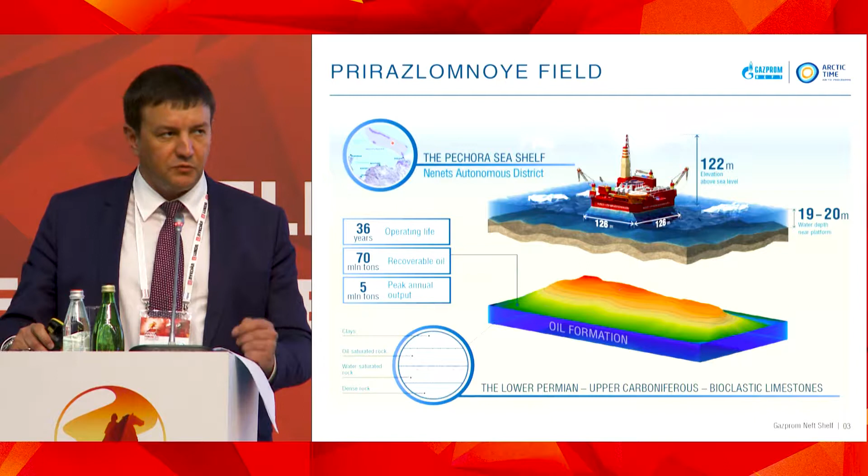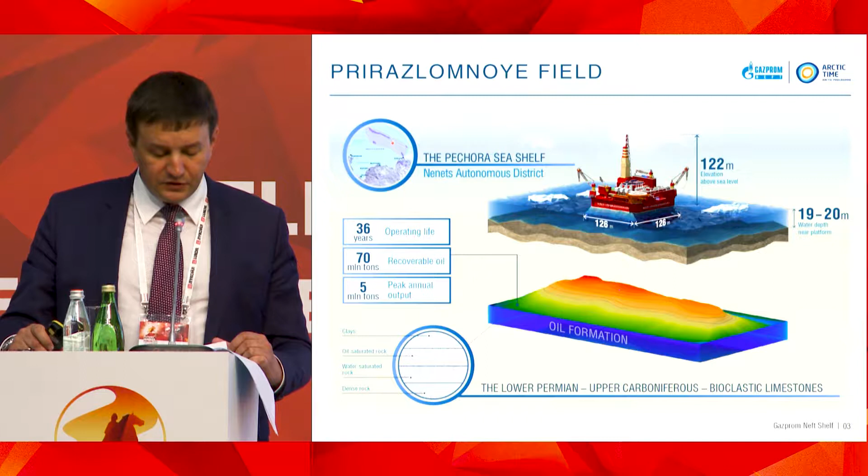This slide shows the geological map of the Prirazlomnoye field. Sea depth is about 19 to 20 meters, and the platform, viewed from above, has an area equivalent to 2 football fields. The operation period will be about 36 years, with the possibility of extending it, and recoverable oil reserves are about 70 million tons.

Climatic conditions in the area of the platform are quite severe. The minimum temperature might be minus 50 degrees centigrade. In the area of the platform, there are about 22 storms a year. Wind speed reaches 8 to 9 points, and wave height during a storm can be up to 9 meters.

Last year we had a storm that happens once in 50 years, with wave heights of up to 15 meters. We also have drifting ice about 7 months a year. Today, the 25th of June, ice is still drifting there.

What are the success factors that are key for the success of the Prirazlomnoye project? Primarily, this is technological efficiency, safety, and environmental friendliness, and of course people are behind all this. Technological effectiveness is clear — in order to produce in the Arctic, we need to apply advanced technological solutions. Previously we couldn't do it, but now there are methods which make it possible to do it and to work safely.

We have a well stock of 32 wells. We have drilled 19 wells so far: 11 of them are producing wells, 6 are pumping wells, and 1 is a special well for sludge drilling, with 1 drilling rig. At the same time, we have the drilling process, oil preparation process, storage, and shipment.

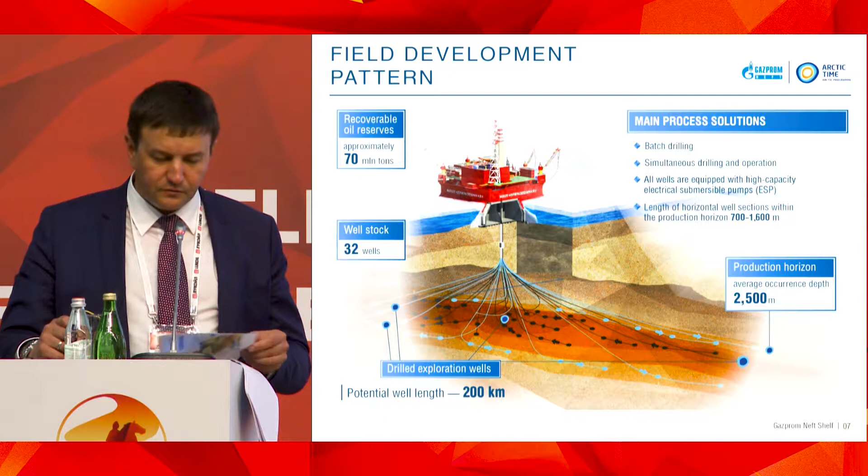All the producing wells are equipped with electric centrifugal pumps of high productivity, and the expected length by the end of development will be about 200 kilometers.

Then the technological parameters of the Prirazlomnoye platform: an accommodation block with a capacity of 200 people. There is a system of devices for comprehensive shipment of oil, and on the platform there is a wave deflector and an ice deflector.

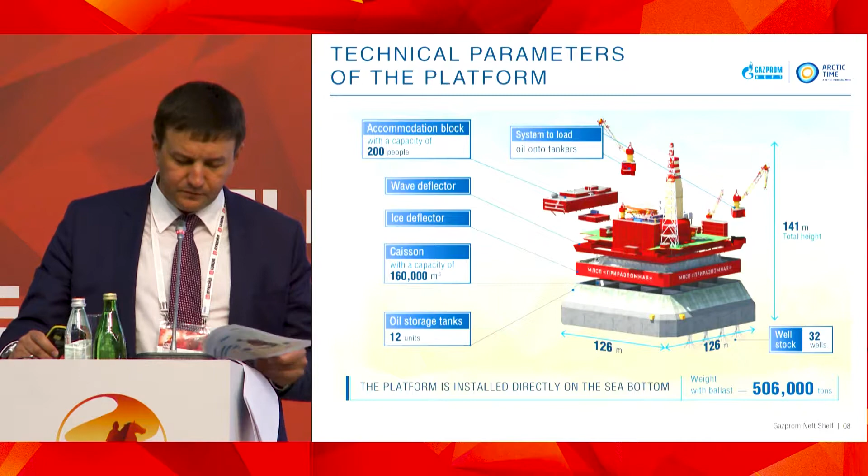It is clear that the wave deflector saves against waves, and the ice deflector helps to combat with the burden of ice. Caisson has a capacity of about 160,000 cubic meters. The oil storage tanks are 12.

A caisson protection system is represented by 2 deflectors, and we also have the low part of the base of the platform with a double layer of steel. There is cathodic and anodic protection and paint. The weight of the platform, including ballast, is more than 500,000 tons.

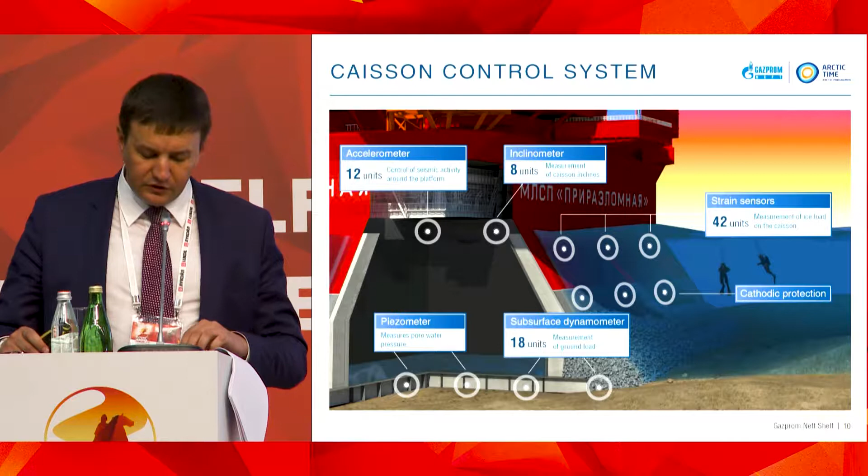This slide shows the caisson control system. We collect data from different sensors, which determine the seismic activity of the platform, measure the incline of the caisson, and ice loads on the caisson. They measure the burden of the platform on soil and water pressure as well.

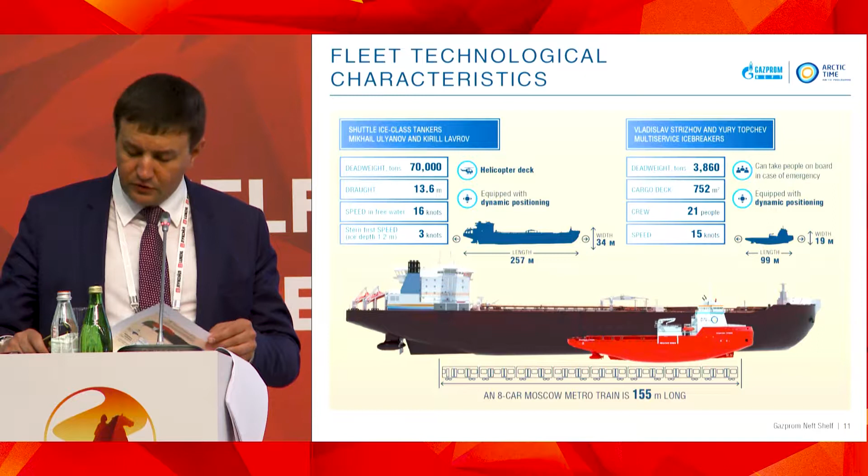Especially for this project, we built the fleet. We have 2 shuttle tankers of ice class, each with a dead weight of 70,000 tons, and 2 multifunctional icebreaker vessels, Vladislav Strizhov and Yury Topchev. In addition to these vessels built for the project, each year we involve different other vessels, supply vessels, and rescue vessels as well, which are operating around the clock near the platform.

Factor number 2, industrial safety. The company places major emphasis and time on safety.

In the next slide, you can see the evacuation and life-saving system for the personnel in case of some unforeseen problems. Evacuation bridges, 8 rafts for 280 people, and a fire-resistant assembly point for 264 persons, where you can stay safely for 2 hours. High evacuation speed, we attain through exercise.

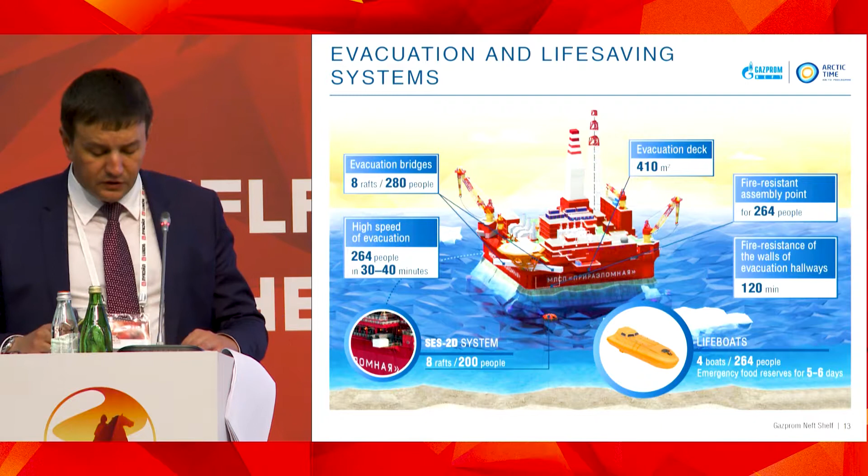We have 8 to 10 minutes when the personnel is assembled, and complete evacuation is within 40 minutes at maximum. As one of the major means of evacuation, we have 4 lifeboats for 264 people.

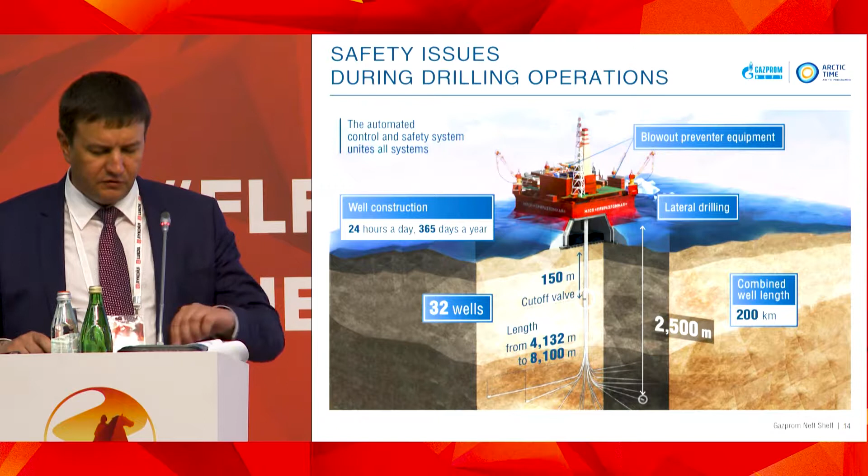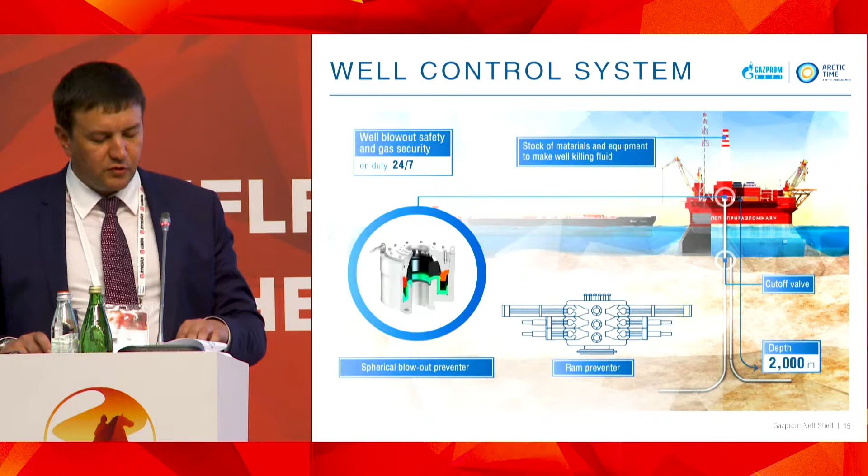The logistics personnel are moving to Arkhangelsk city from Moscow and from St. Petersburg typically. Then for 2.5 hours there is a charter plane to Varandey where we have a transshipment base. And then by helicopter equipped for maritime operations, they are moved to the platform, which takes another 35 or 40 minutes.

For oil transportation, we first used to transport all the way up to Rotterdam. Presently the amount of oil has been growing, so a decision was made to store oil in tanks in Murmansk port, where oil transshipment is done, and then by tankers we transport oil to consumers. The supply base is also located in Murmansk, 980 kilometers away from the platform.

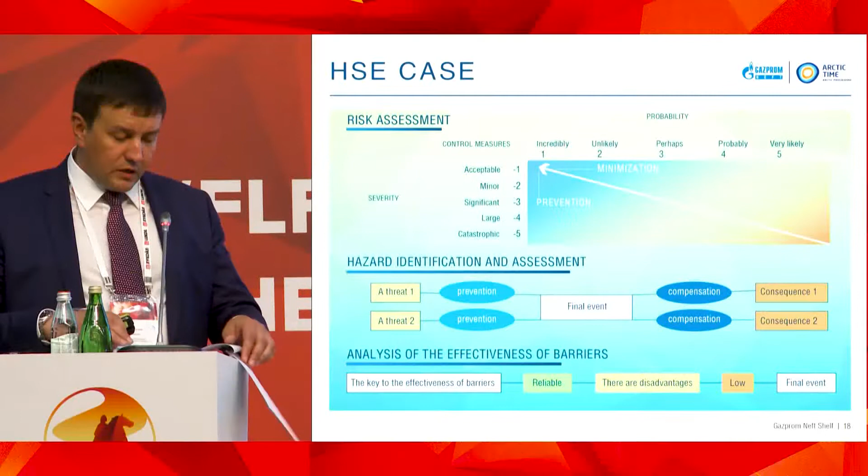The company has been using best practices in HSE systems, and it has also developed an HSE case. It's a document. I think you know what an HSE case is all about. Our platform has got hazard class number 1. It's a hazardous production object. As in any hazardous site, we have the risks of full-scale accidents.

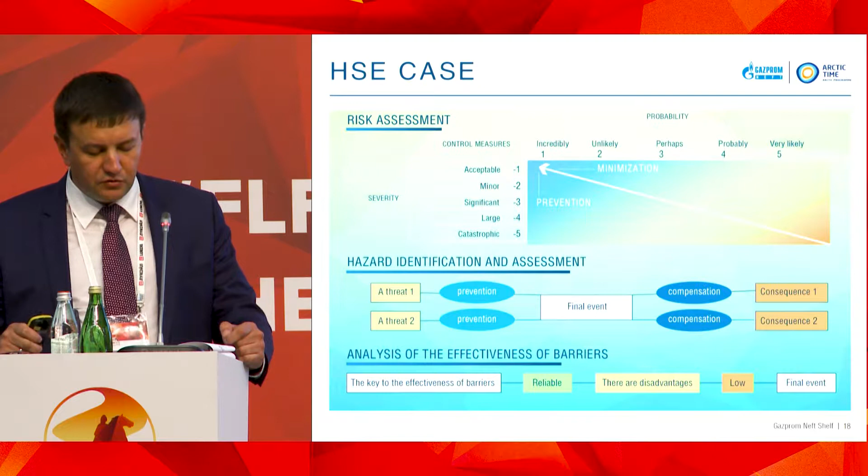As operator organization, we are responsible for development of safety measures and for providing several barriers to prevent accidents and to prevent the escalation, provided the incident happened.

The company focuses its attention on the system of prevention of oil spills and oil spill recovery. We have drills and exercises with our local partners who produce oil here, and with the help of specialized organizations having 24-hour vigil on supply vessels and at the Varandey base as well.

We have different scenarios to deal with oil spills, to recover oil spills. We have scenarios for not just oil spill recovery close to the platform, but also to protect the shoreline close to Varandey and adjacent islands nearby.

And the last factor of success of this platform is the fact that it's environmentally friendly. The company invests a lot into environmental safety.

We develop fry fish and release it into the water body. We do monitoring of water seals and other species.

Whitefish and beluga. We can see seals, salmon, and beluga close to the platform. Sometimes polar bears come close to the platform too.

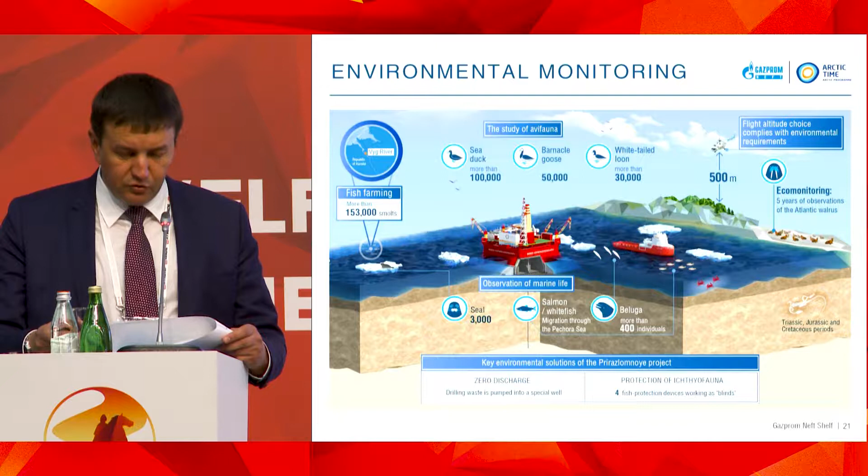Summarizing, I can say that the company puts together a lot of effort, mindful of different geopolitical limitations and harsh Arctic climatic conditions.

To carry through with the development of oil fields and do it in a safe way, caring about nature as well. Thank you.

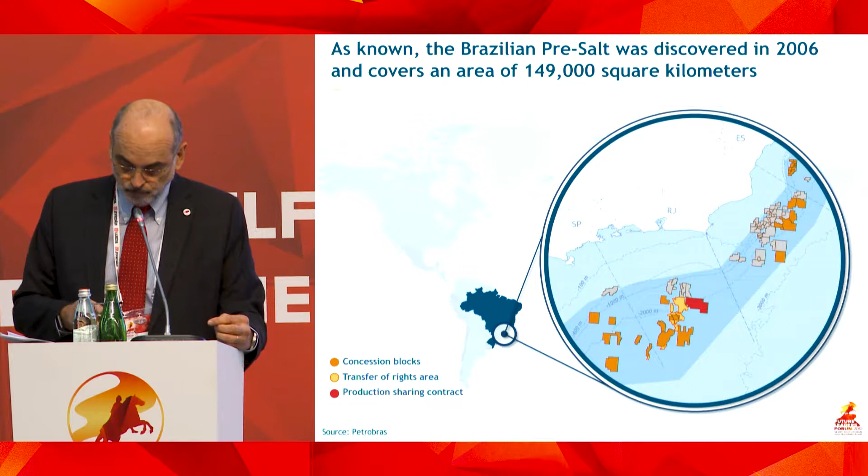In Santos Basin, the reservoirs are located in water depths ranging from 2,000 to 2,500 meters.

And the salt layer itself has an average thickness of 2,000 meters. The reservoir's depth ranges from...

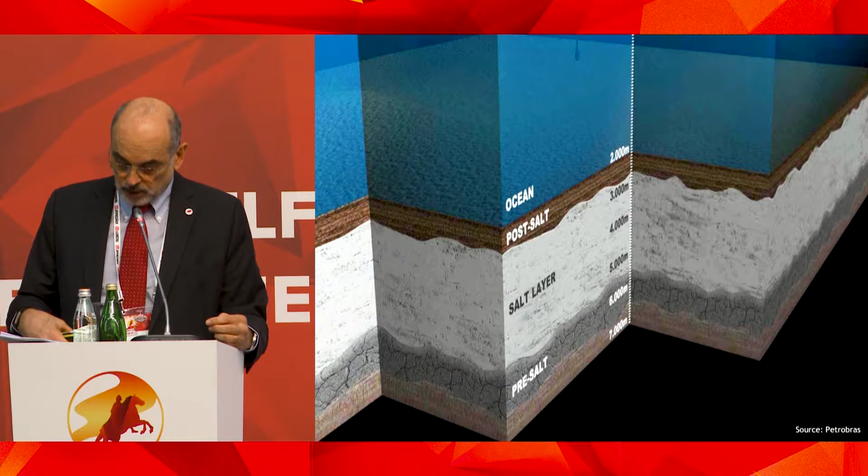5,000 meters to 7,000 meters, while the reservoir net pay ranges from 150 to 450 meters.

To better understand those numbers, one can note that the total reservoirs depth in the pre-salt fields is equivalent to the height of K2 mountain.

Nonetheless, we did not start from scratch. We relied heavily on our previous experience in Campos Basin, where we have produced oil and gas since the late 70s.

To conquer pre-salt, hard work, heavy planning, strategy, discipline, knowledge, teamwork, focus, and determination were fundamental requirements, as well as intense investments in technology.

Together with the supply chain, we developed or adapted technologies that have made pre-salt production technically and economically feasible.

Pre-salt projects show very attractive break-even. The expertise acquired over the years, together with our historical experience in deep water, enabled us to develop it, taking advantage of the reservoir's high productivity.

We have wells producing 40,000 barrels per day.

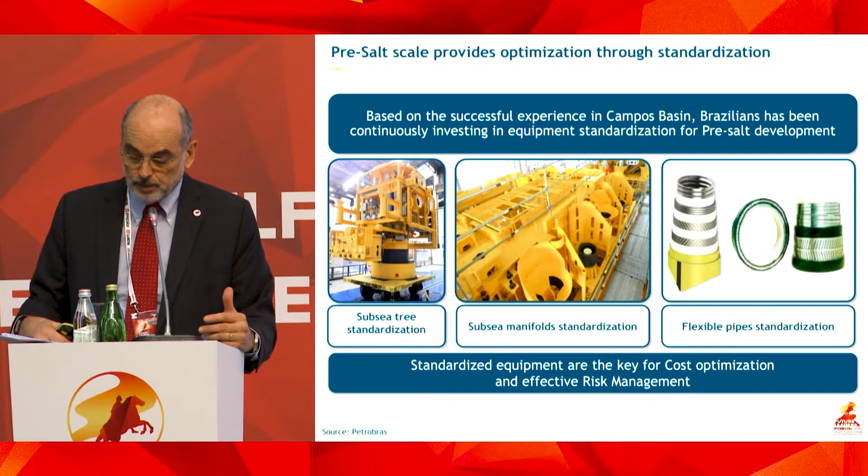Those upsides are better resource allocation and more effective risk management. On the supplier side, the benefits are scale of production, spare parts reduction, and reduction of engineering times.

Relevant new technologies in subsystems were developed to cope with the pre-salt challenges in ultra-deep water, like the buoy-supported risers. Important well innovations to deal with thick salt layers, different contaminants, and reservoir characteristics were also implemented.

Compact CO2 separation system and the first application of water alternating gas injection in an ultra-deep water field are also important pre-salt achievements. All these technologies have allowed pre-salt economic production.

For the near future, what do we have on our radar? Here are some disruptive technologies that will help us push forward the limits.

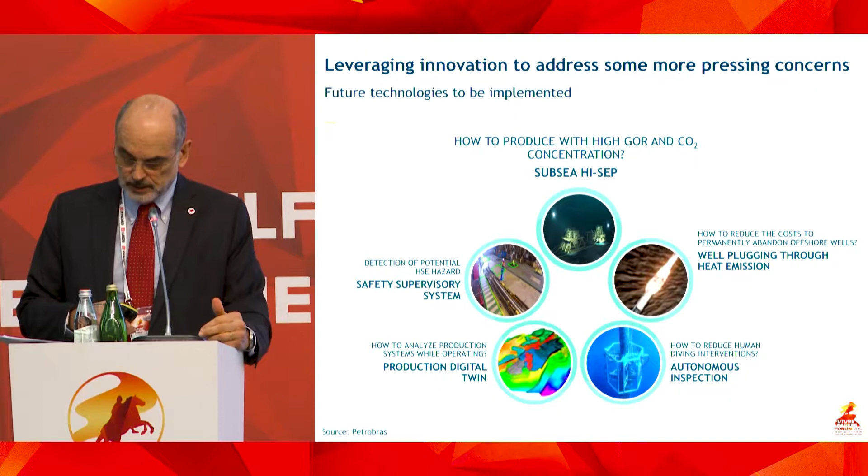Production digital twin will optimize interventions in our production assets through a digital replica of the production systems. Subsea HI-SEP will allow us to enhance our technology of subsea separation.

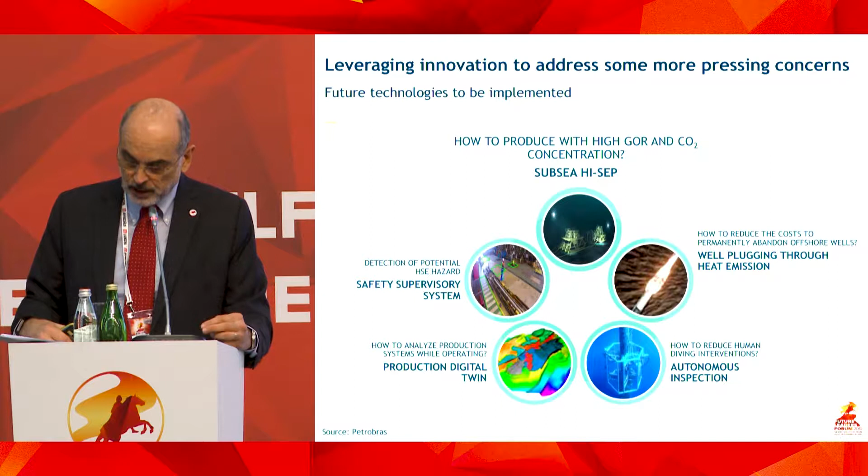This includes CO2 and gas separation, reducing the gas-oil ratio of produced fluid, and a safety supervisory system based on intelligent video analytics for potential hazard detection and prevention.

Also, well plugging technology using heat emission, allowing us to reduce the cost of well abandonment. And autonomous inspection enables diverless inspections for cleaning and visual inspection of risers up to 50 meters water depth.

Finally, I would like to highlight that the implementation of this portfolio of mega projects is a result of teamwork: oil companies, employees, partners, suppliers, service contractors, and academia working together to deliver sustainable and successful projects. Thank you very much.

Thank you very much, Mr. Filho. I hope the new technologies will also help us find new discoveries from the pre-salt structures. So thank you.

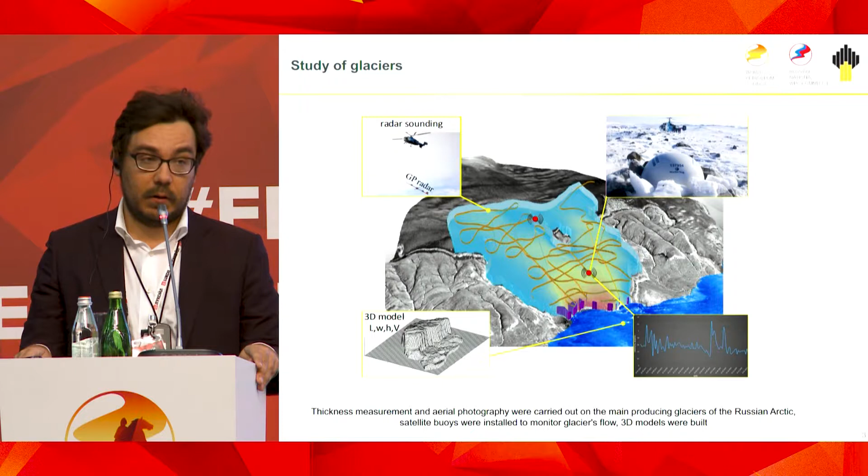You can see them in this figure, shown in lilac. These are the zones where the maximum formation of icebergs proceeds.

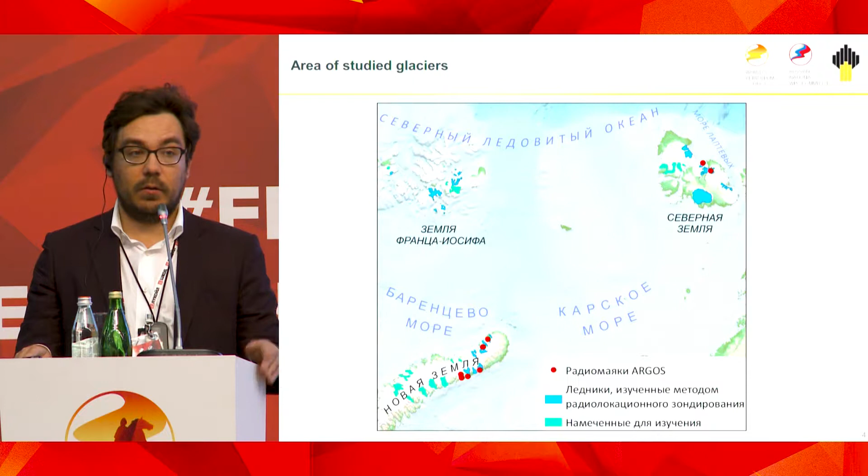Some words about the area of studied glaciers. The company studied more than 70% of iceberg-producing glaciers in the Russian Arctic. You can see the light green color is what remained. In principle, in Franz Josef Land, Severnaya Zemlya, and Novaya Zemlya, the studies of glaciers have been completed. If we compare it with Canada, similar work was conducted in Greenland.

Inland area — just a few words about the study of icebergs. There are observations from on board icebreakers, airborne observations, a system of meteo stations, and a system of buoys installed in all the seas of the Russian Arctic. That was the first step, to determine weather conditions and also oceanological characteristics.

After that, in 2016 and 2017, Rosneft jointly with its subsidiary, the Arctic Research Center in St. Petersburg, and the Institute of Arctic and Antarctic Research, conducted major expeditions to study the possibilities of deviating icebergs. They used the Russian icebreakers — the diesel icebreaker Kapitan Dranitsyn and the Novorossiysk icebreaker.

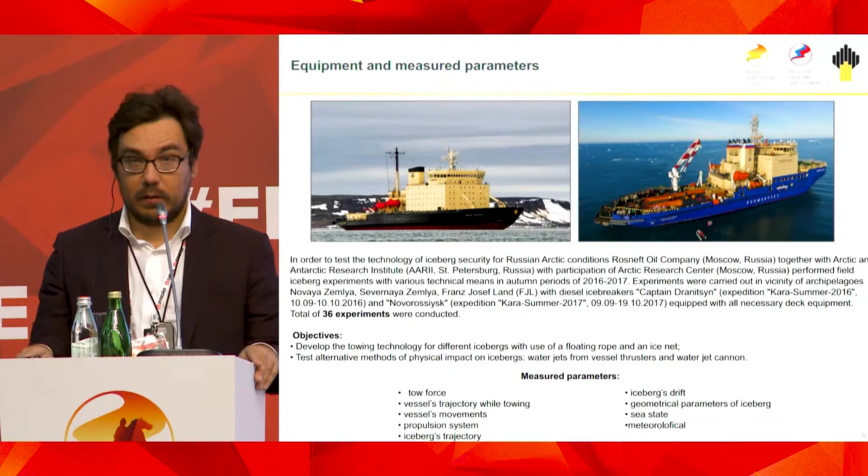During these works, they towed 36 icebergs and measured practically all the parameters accompanying towage. They determined the force necessary for tugging, the iceberg movement parameters and the vessel movement parameters, kinematic and dynamic parameters, as well as building a 3D model for the iceberg. A buoy was mounted on it, and they determined the parameters of the environment as well.

They tested towing both by rope and by net.

It is clear that the technology was developed in Canada, but I can tell you immediately that the conditions of the Russian Arctic are slightly different. So the technology and its application were modified. Not only modified, but a new scientific approach was proposed to reduce the iceberg hazard at all stages.

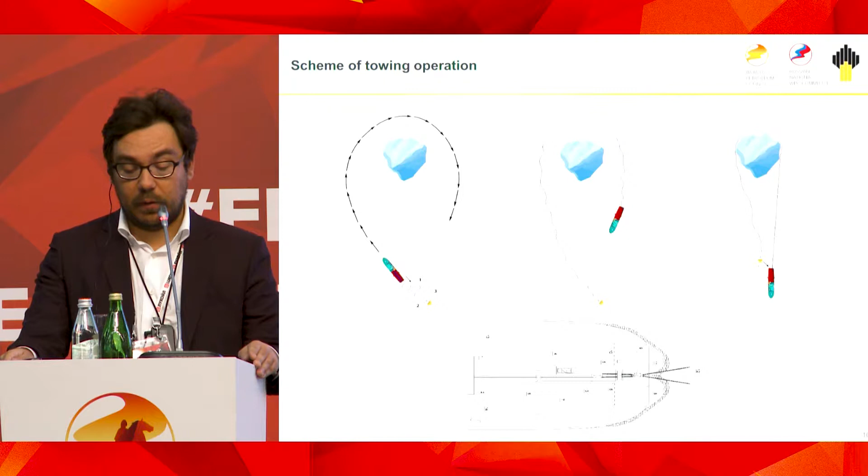One slide shows how it is done — how the vessel throws a rope and then collects it, after which the process of towing starts. That is the first stage of towing.

The main technological results: the mass of all towed icebergs exceeded 5 million tons. As for local results, the maximum mass of one iceberg was 1.1 million tons, the minimum mass 3,000 tons.

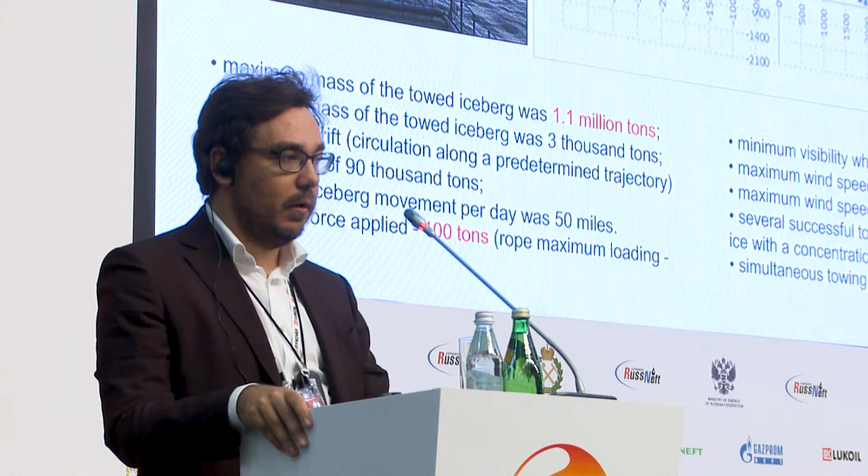Controlled drifts were conducted. You can see the geometric symbol along the trajectory where they towed the iceberg to Franz Josef Land. The maximum iceberg movement per day was 50 miles.

That made it possible to guarantee its removal from any oil and gas production structure. Maximum force applied from the rope was 100 tons, or 1,000 kilonewtons. The minimum visibility at maneuvering was 300 meters, also a good result. Maximum wind speed was 20 meters per second during towing.

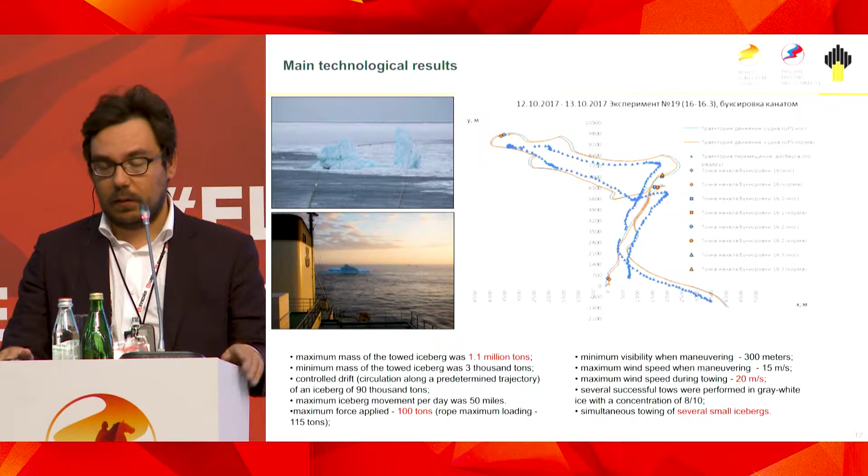This was probably the first time this work was done and published in open press, so we were the first to do that. We had several successful towings in gray-white ice with concentration of 8/10, and we also managed simultaneous towing of several small icebergs.

I would like to mention that during towing, not everything is so simple. It is not just catching and dragging — you have to think. In this slide, you can see a 3D model of an iceberg that was plotted, showing how it is towed and the trajectory we had.

If the vessel trajectory is a straight line, you can see that towing of the iceberg is accompanied by significant fluctuations, which have a drastic effect on the requirements for the vessel and on changing the route. If you do not precisely choose the route, you will get a periodical process that deteriorates the conditions of towing.

The theoretical notions about towing prior to our works were primitive. During towing, the effort gradually increased, so we could determine characteristics of iceberg drifting at different velocities.

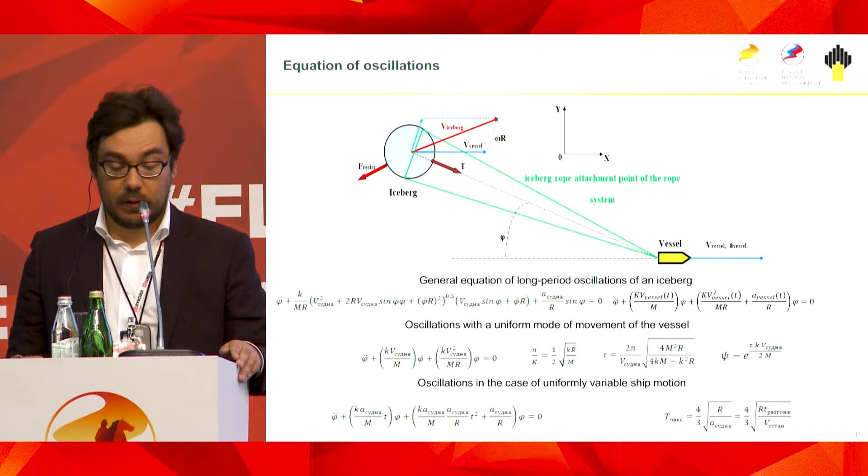The mathematical model that was plotted was quite primitive from the viewpoint of mathematics, but everything worked out, and there was an unusual result — a surprise both for the Russian Arctic side and for our Canadian colleagues. As a result of our experiments, it appeared that the resistance coefficient, the dependence between the force and the rate attained by the iceberg, is not linear.

It is determined by the Reynolds number. That is a significant factor when we develop iceberg safety measures. It is reduced from 8 to 2 with increasing towing speed, and below you can see a certain assessment of the speed.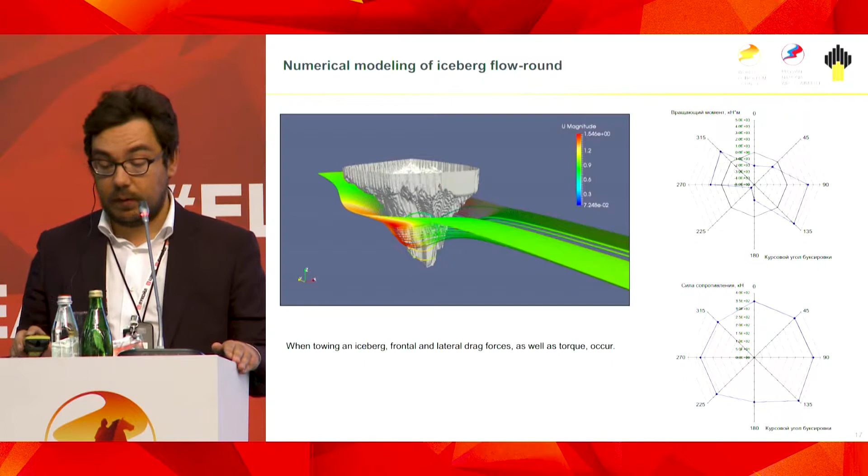If I use 1,000 kilonewtons, it's clear that after a major integrated expedition was organized, the mathematical modeling and the results were coincident. One of the slides shows specifically how we realized that process in the software.

I can tell a few words about alternative methods of physical impact for combating icebergs. In addition to towing, for the conditions of the current Barents Sea, we can destroy them by gradual circulation around them by a vessel. If you just move the vessel around in a destructive pattern, the iceberg will be totally destroyed, washed out, and will be of no hazard to your structure.

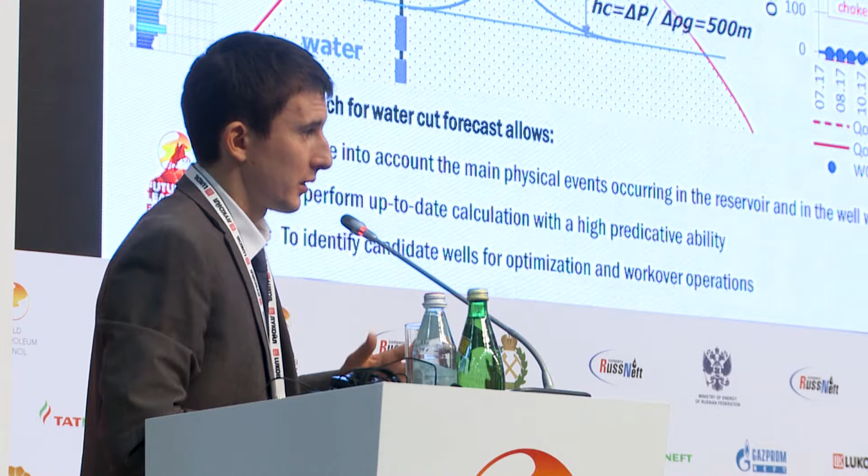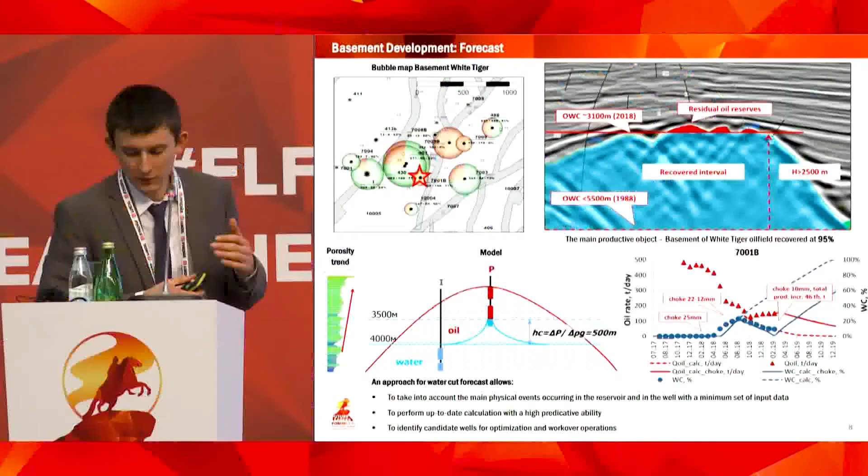Depressions are very small, like several atmospheres. Only the change in the diameter of the pin can reduce the cone influence. Well 7001B shows how the reduced diameter of the pin to 10 millimeters enabled us to get extra oil production from the well and to reduce water cuts from 10% to 0.

So in 2015, we understood that the basement, the entire major basement, is almost depleted. So we shifted to terrigenous deposits.

As a result of the seismic studies, we identified productive traps. 3D seismics is high-resolution seismics, and the blocks which were considered not to be productive, we now see as productive traps. So we found some fields like White Cat field, which we will develop. We have it in our plans.

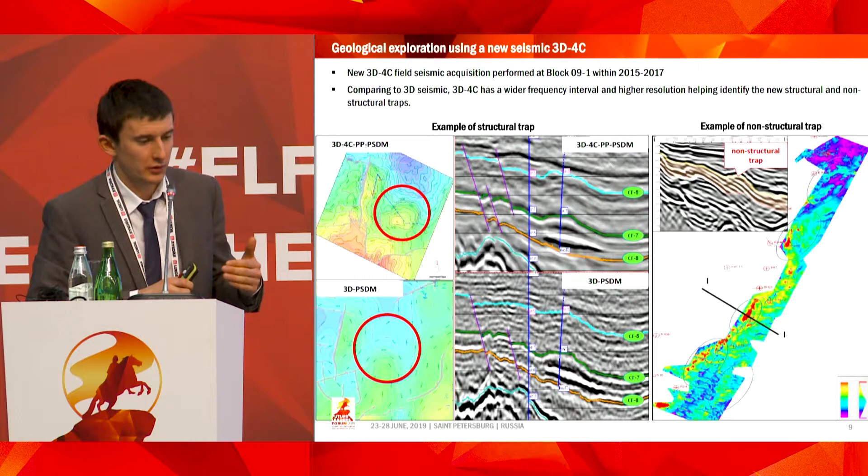The seismics 3D, 4C, apart from structural traps, we identify non-structural traps as well. It's based on the analysis of seismic attributes for a specific zone. So we have been working along those lines as well, making those computations.

It's crystal clear that those new traps are small ones. We won't find anything like another White Tiger. So all the previous decisions for infrastructure, block conductor, or fixed platforms will not be applied here. As to those small blocks, we can develop them only when we increase those cells on already existing block conductors. Those cells previously were not envisaged by the project, but detailed analysis of structure and peculiarities of block conductors enables us to make those extra cells.

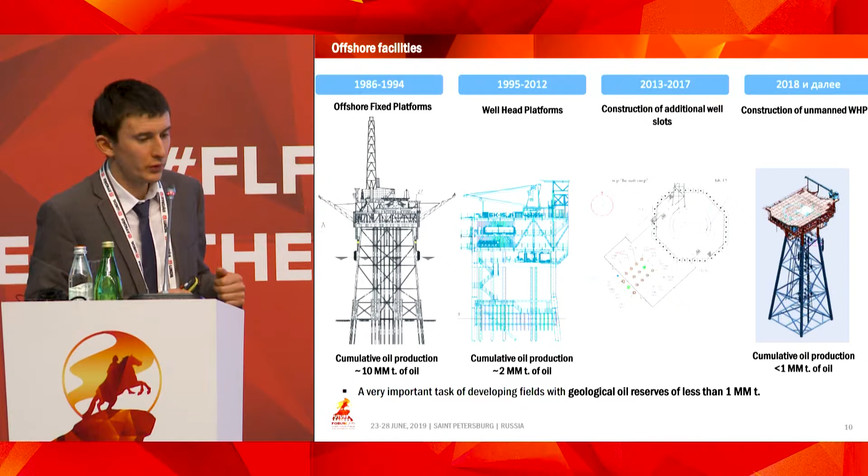Another direction is using a super-light unmanned platform. I would like to demonstrate the way those two directions are developed by us.

For example, we identified a prospective drilling target west of the developed field. Actually, the reserves there amount up to 800,000 tons. Drilling a well just in this drilling target is rather risky. So when we design the profile well, we always select the reserve zone in such a way that in case the drilling target is not oil and gas proliferous, we can do the kick-off. Here the oil proliferous property of this drilling target was very good, so we drilled an extra well.

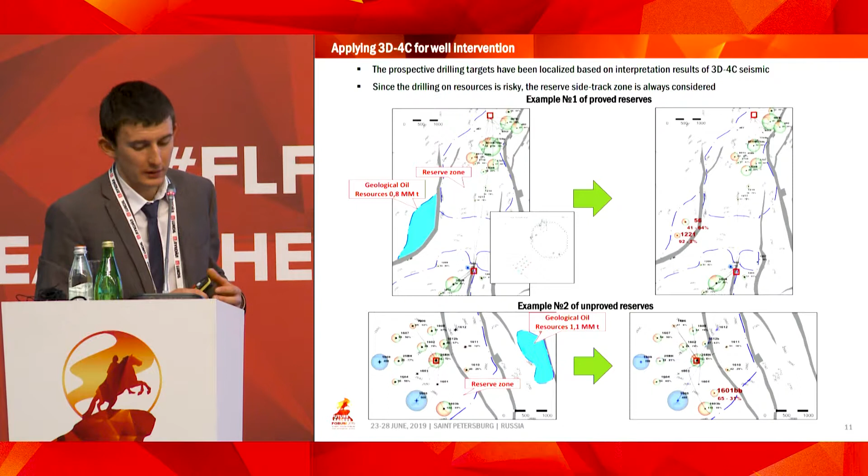As a result of drilling the western part of the block, this drilling target was not there, so we kicked off the lateral into this prospective zone. That way we right-sized our costs of production.

Next, using unmanned platforms: in 2017, we discovered a small field, White Cat. We developed the system, we identified the system of development. We decided to use an unmanned platform. In this field, we identified a small marginal place which is divided by a tectonic fault into two blocks.

Another direction we embarked upon is just working with those stocks. There is a circular system, there is gas lift, so every day something happens: pressure goes down, then the pressure is switched to upper valves, then the pressure goes up. It's possible to leverage it, but if it's 300 wells, it's not possible to analyze the entire stock of wells. So we introduced a technological mode to operate that as well.

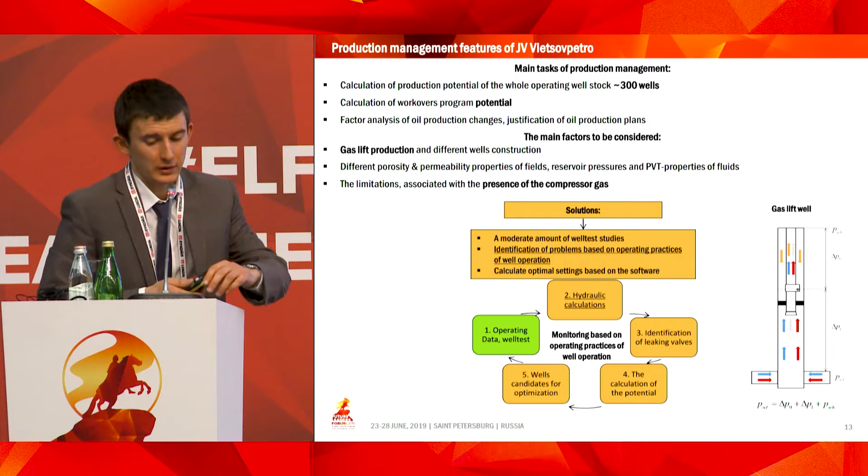It's used in Russia in such a way that we automatically identify the potential of the well, to automatically identify problem wells, and technologists will develop workover plans in order to increase the potential from all those wells.

This technological mode is quite predictable, and the pressure outside the borehole correlates with the results of hydrodynamic studies. Automatically for each well we identify the optimum gas lift flow rate, minimum and maximum flow rate, and pressure outside the borehole.

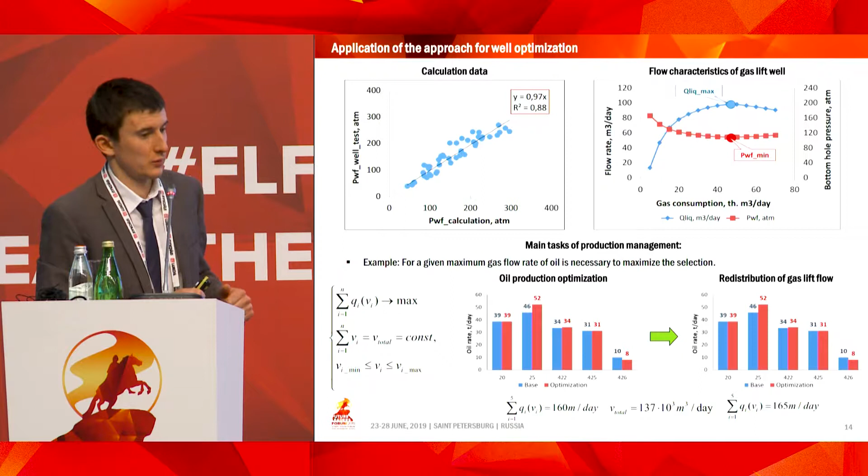This technological tool is used to optimize production when there are limited volumes of compression capacities. We should optimize gas flow rate along the wells to maximize oil production. We use methods of analysis with different technological modes, and this shows we can increase production from one platform by 3%.

So we work at the optimum level. But with the development of electrical centrifugal pumps and increasing the period between workovers, we still use gas lift as well, and we should be fully aware of our potential. We do the completion of wells with ESP, and presently 8,000 tons is produced by gas lift, and we have to optimize all the wells.

Provided we didn't have limitations on compression, production would only go up by 8%, and the pressure from 112 would go down to 107 atmospheres. That is the bottom hole pressure.

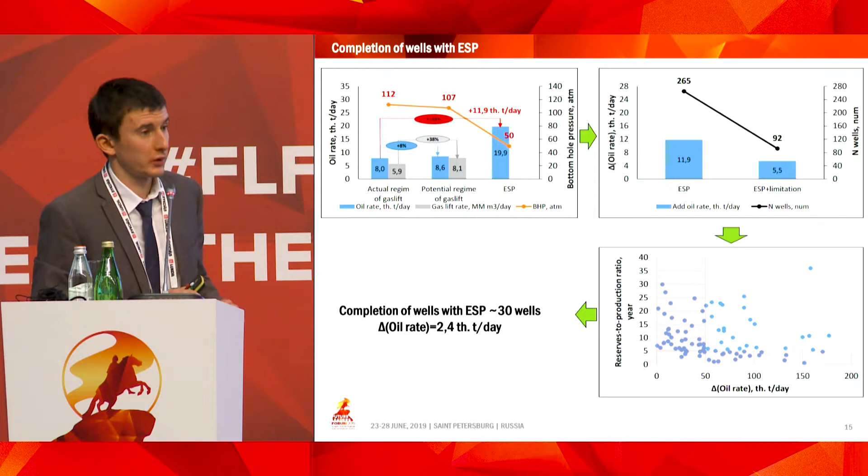When we analyze the stock of all the wells, we can see that 265 wells provide us with increased production, but it's due to very few wells, because of some limitations in the condition of the stock and so on. We do feasibility studies, so it should be at least 50 tons for the enhancement of flow rate.

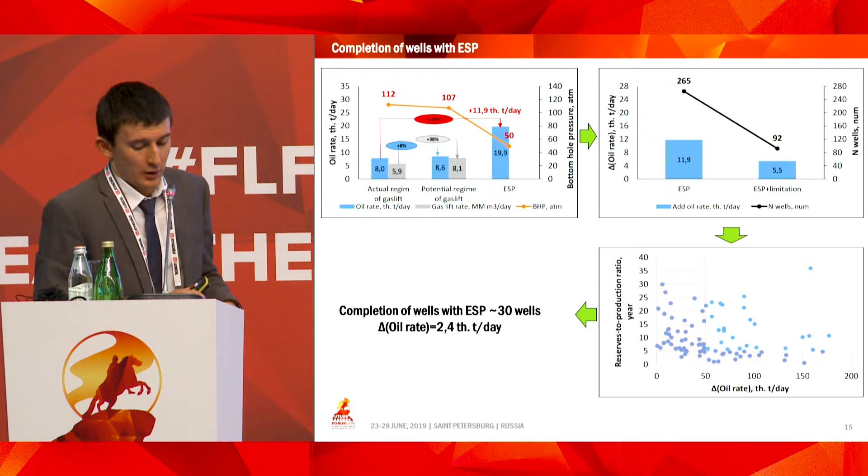We have got about 10% of all the wells which we should equip with ESPs to get a total increase of 2,400 tons. We have embarked upon the completion of wells with ESP, and for 5 wells we're doing that mostly.

By summarizing, I would say that presently the joint venture with Petro stabilizes the production of the enterprise. We use all the state-of-the-art technologies from different countries, and we solve the task because we have 40 years of experience in our enterprise, and we do geological exploration.

It's application of modern approaches for seismic interpretation. We also search and test for potential traps, whether structural or non-structural type. From the standpoint of production, it's sustained work. We optimize gas lift performance. We do the completion of wells with ESP, and we use EOR methods for developed reserves.

So that about wraps it up. Thank you very much.

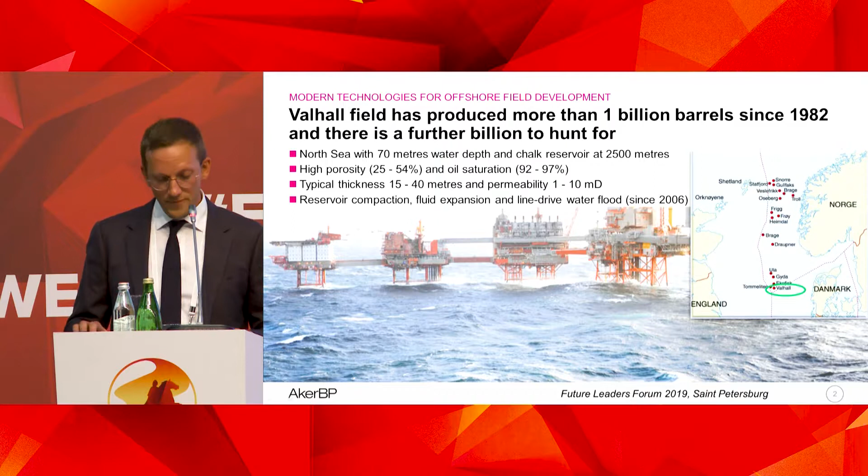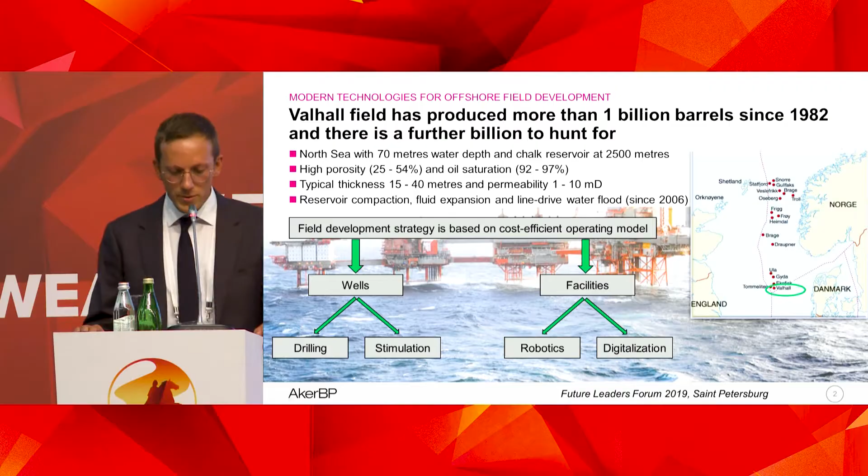To produce another billion barrels, we base our field development strategy on a cost-efficient operating model, which includes modern technologies for drilling and stimulation of wells, and robotics and digitalization for facilities.

So all new wells have to be drilled with anti-collision technologies, and their trajectories are complex. Common drilling challenges we experience are overburden wellbore instability, losses in permeable zones, and very low reservoir pressure in some parts of the field.

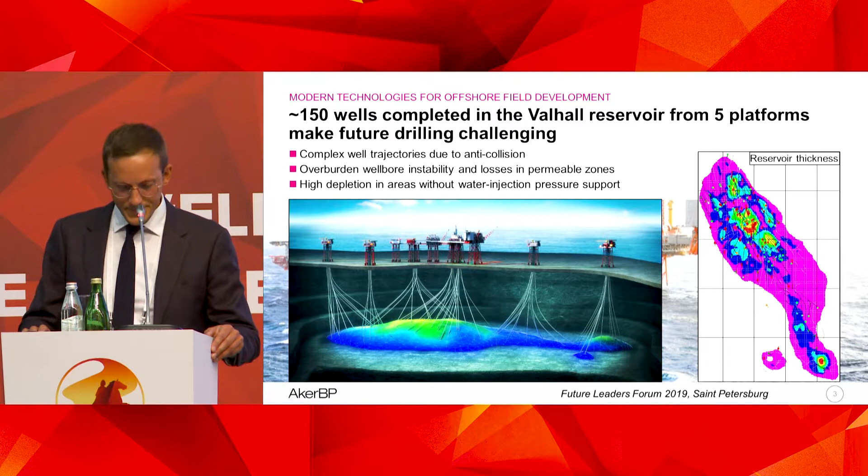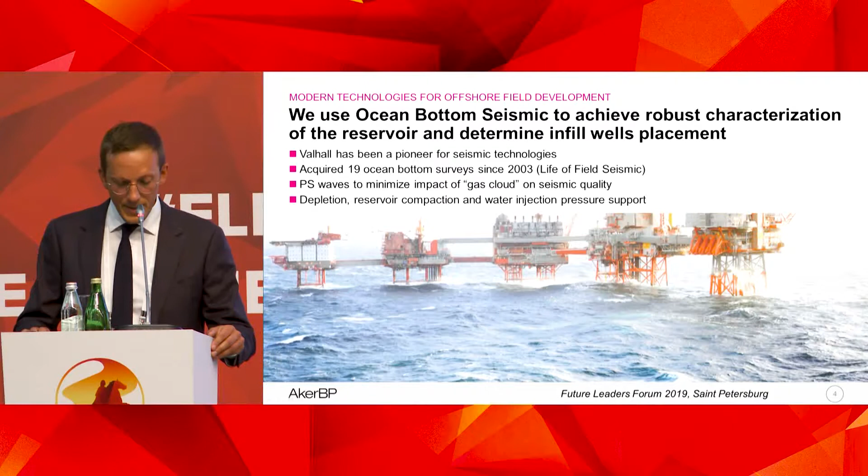Understanding the reservoir is key for Valhall development. We use 4D seismic a lot, and Valhall has been a pioneer for seismic technologies, starting with 2D in the 70s, then first streamer 3D seismic in 1992, and 3D ocean bottom surveys imaging with both PS and PP events in 2003. Today we have permanent cables at the seabed, increasing the coverage of the field. By now we've acquired 19 ocean bottom surveys, and we call our PRM system Life of Field Seismic.

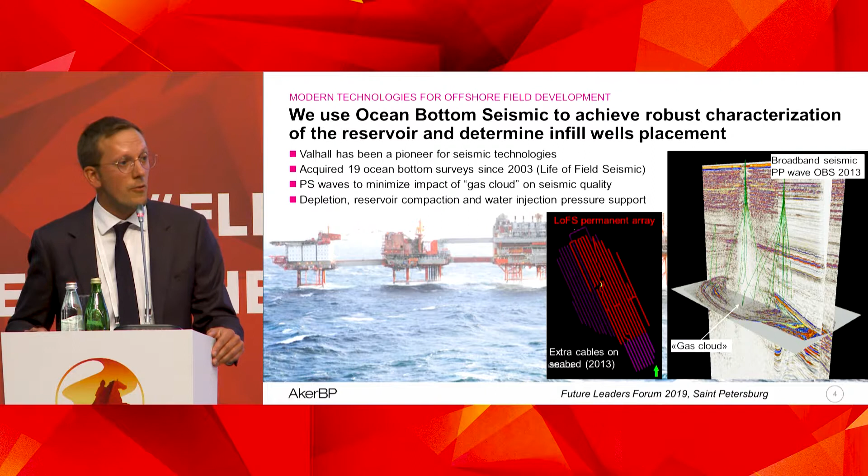The next is PP wave from the 2013 ocean bottom survey, and you can see significant improvement in imaging of both overburden and the reservoir. And finally, PS wave from 2013 OBS. You can see that the impact of gas cloud on seismic quality is significantly reduced.

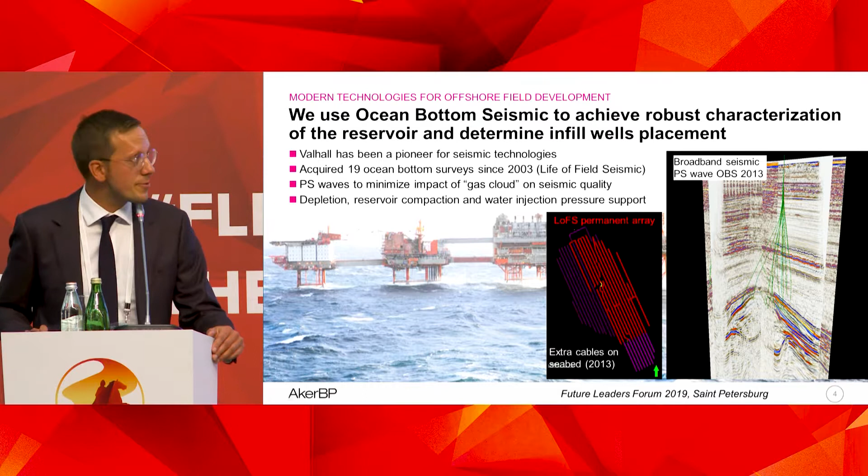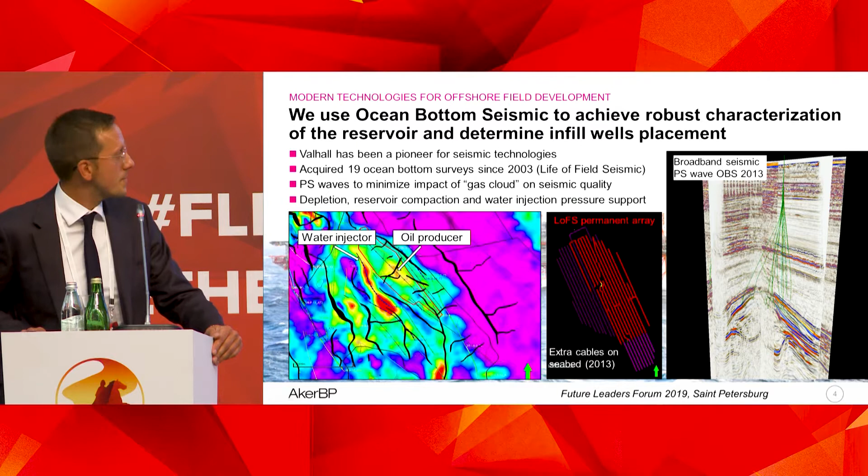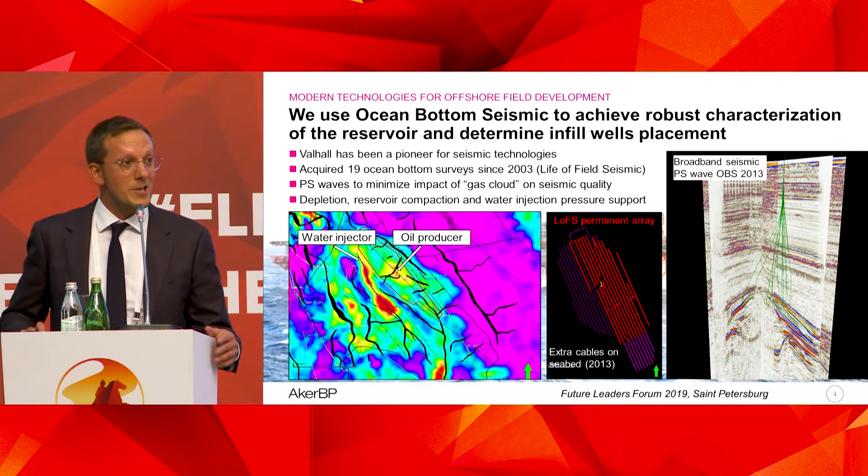So we use LOFS to continuously monitor depletion, reservoir compaction, and water flood injection pressure support. This is an example, and you can see a water injection well with a red signal around it, indicating that pressure is increasing, and a nearby producer where you can see only part of the well with a red signal, giving indications that there's depletion in that part of the reservoir.

Let's go over to drilling. This is a reservoir section of a recently drilled well. We drill with geosteering and ultra-deep resistivity tools to achieve upside well potentials. You can see that the white squares above and below the drilled section are ultra-deep resistivity tool measurements, showing the top and base of the drilled formation.

Confidence in drilling thin reservoir sections and optimal wellbore placement in the lately completed seven wells allowed us to achieve 60% higher reserves compared to pre-drilled estimates. You can see the comparison on the bar chart on the right, showing well length pre-drilled versus resource associated with the drilled wells.

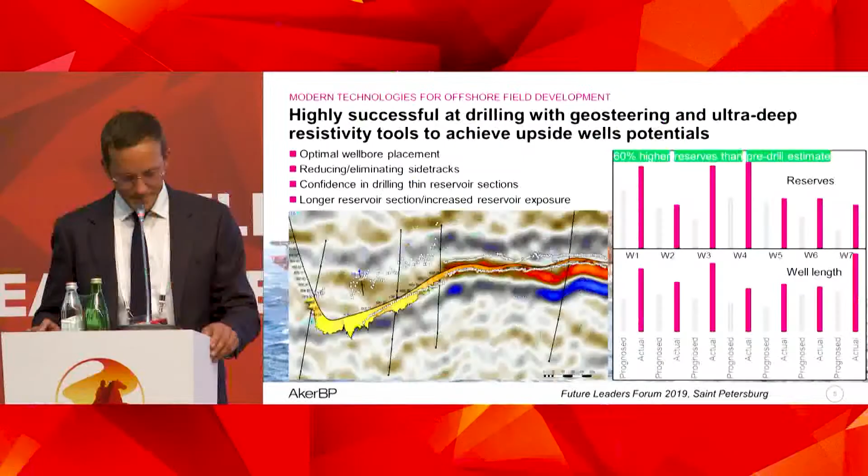For drilling a very low pressure target, we used a new type of mud. Nitrogen-filled hollow glass spheres were used with the drilling fluid, lowering the density to 6.5 to 7.0 pounds per gallon while drilling the reservoir section. That was the first application worldwide, requiring extensive lab testing and simulations prior to deployment. Pictures of the vacuum truck used for testing and the hollow glass spheres are presented on the slide.

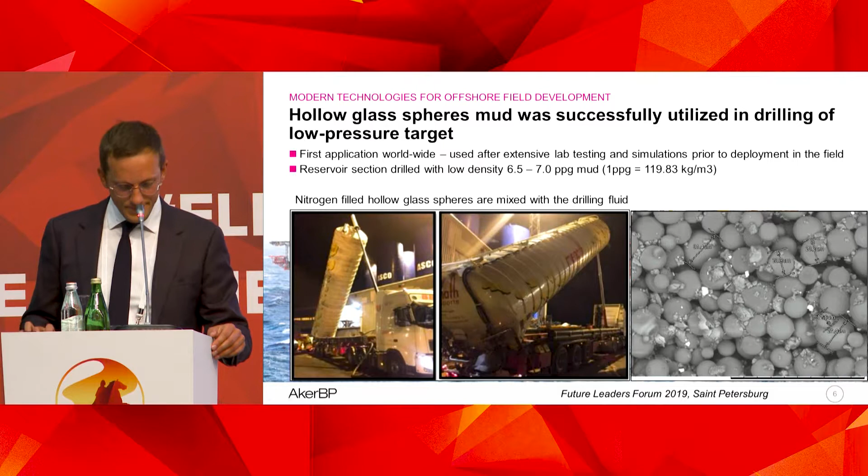Moving away from drilling, I'd like to talk about stimulation. To reduce well stimulation operational time and cost, today we're exploring single-trip multi-frac and fishbones technologies. Most of the Valhall producers are hydraulically fractured with proppant, and each fracture requires a minimum of 2 coil tubing runs.

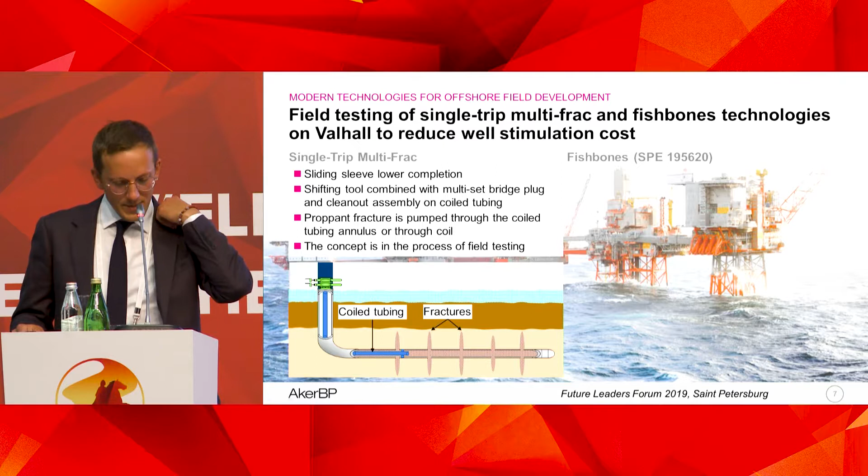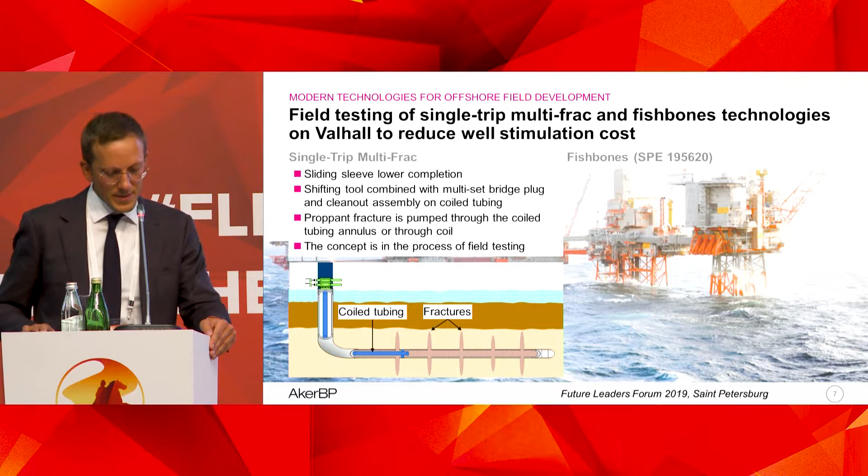This is a time-consuming and expensive operation. So the single-trip multi-frac technology allows stimulation of several zones without pulling coil tubing out of the hole, and the bottom hole assembly is designed to open and close sleeves and also perform clean-out. This concept is in the process of field testing.

Now, fishbones. Conventional fishbones is an uncemented liner-deployed completion stimulation system. The technology is comprised of subs spaced out with the liner, each housing small diameter, high-strength tubes called needles. Each needle can be up to 12 meters long, and it's equipped with a jetting nozzle on the front end. The system is activated by pumping hydrochloric acid.

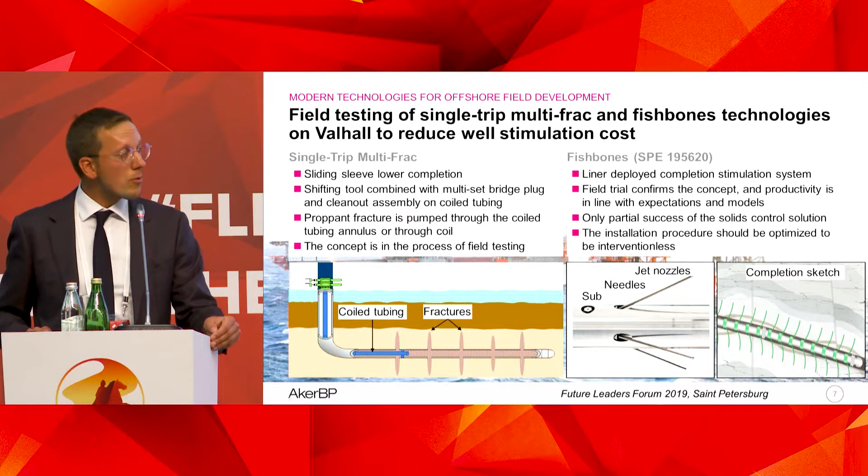Specifically for Valhall, we designed fishbones with solids control to mitigate chalk production. More about our pilot well can be found in SPE paper 195-620.

Finally, a few words about digitalization and robotics. We transform the Valhall field to a cost-efficient operating model through digitalization and robotics. We liberate all field data to a common platform, making it structured and easily accessible, designing cloud-based solutions such as digital field and digital twin.

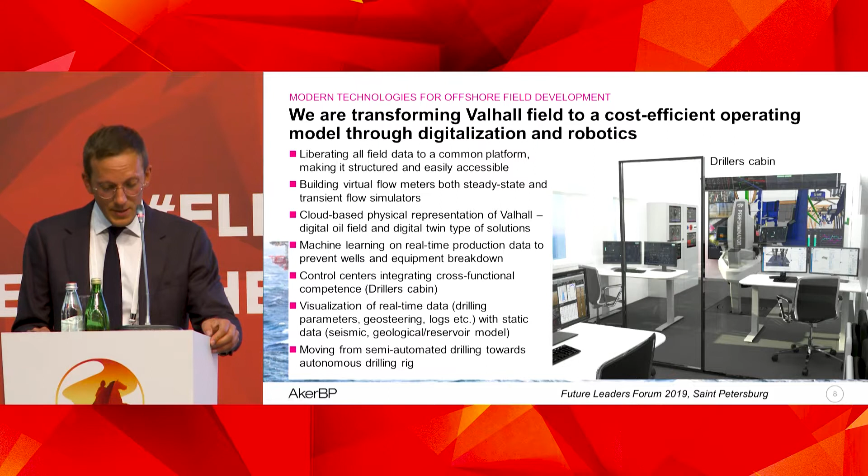Our virtual flow meters are both steady-state and transient flow simulators. We use machine learning on real-time production data to prevent wells and equipment breakdown. We're building control centers such as the driller's cabin, shown in the picture on the slide. This center will integrate cross-functional competence where real-time data will be visualized with static data and models.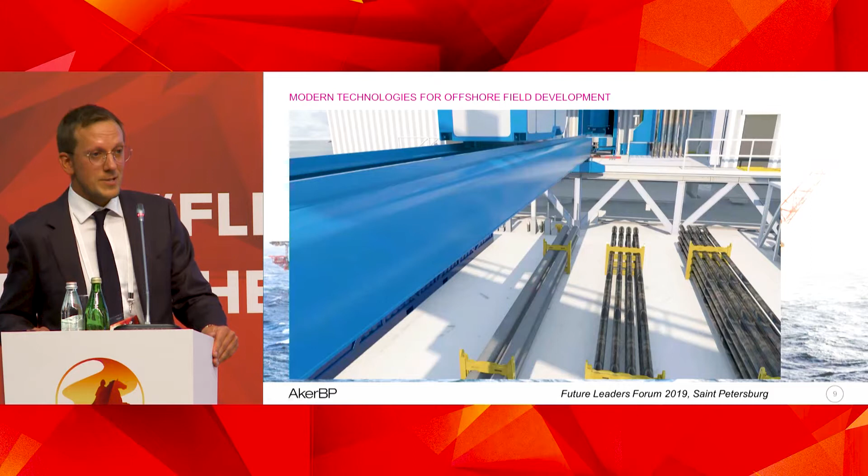Our near-future goal is to go from semi-autonomous drilling to fully autonomous drilling. You can see the rig on the slide, which we are now transforming, and our system is called Performinator. The video is going to show how it's going to operate.

This is an animation of the drilling process. Here you can see the robot taking the bottom hole assembly and bringing it to the drill center. The BHA is then lowered down to the drill center.

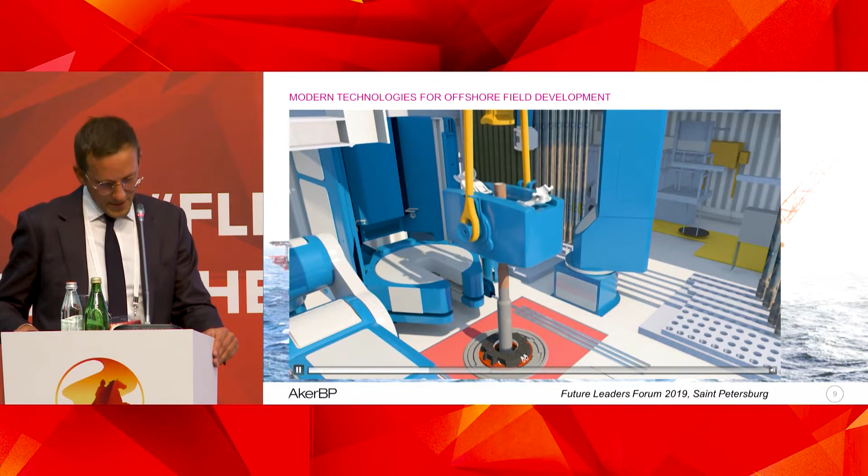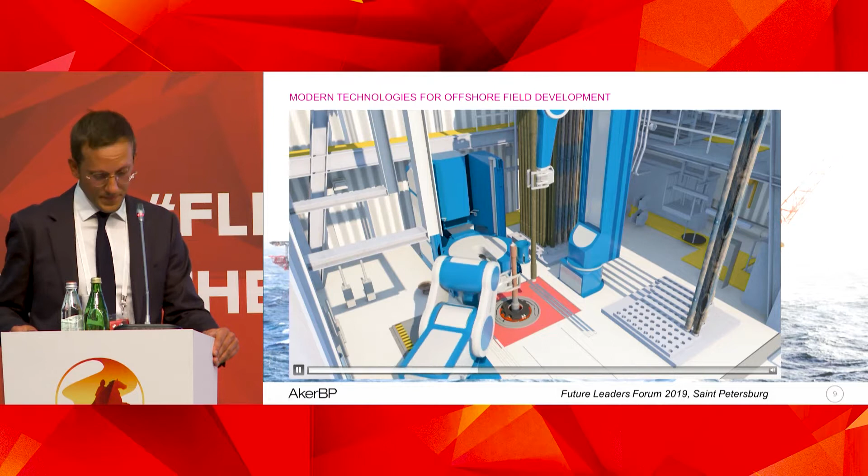So this is going to be a game changer for drilling, greatly reducing manpower operations and presence of people on the drill floor. So then you can see that the lifting sub is getting removed, drill pipe is connected, and everything is ready for starting drilling.

This is an example of simultaneous operation of running 9 5/8 completion and building completion string.

Fully autonomous robotics, pipe handling system, and control systems developed with all interfaces will greatly increase workflow efficiency. Now you can see how the robot is taking 2 pipes from the deck and bringing them to the drill floor, where they are connected and ready to be installed.

Reducing the number of manual operations and human presence on the drill floor will make drilling safe and efficient 24/7. So that was a short overview of the technologies I wanted to present. Thank you for your attention.

Dear Dmitry, thank you very much for your presentation. As a geophysicist, I am very pleased to see some seismic in your and Alexander's presentation as well. Your study shows that we have to combine all the disciplines, all the data, to have success in offshore field development as well. Thank you very much.